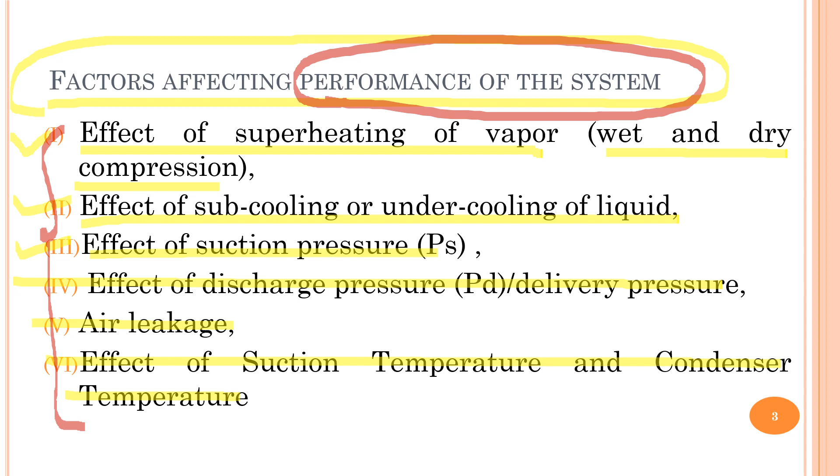So if we find any kind of variation here, what is its effect on the performance of the system, that we have to discuss. And one by one we will start discussion of that part. So first is effect of superheating of vapor.

So you can see the original cycle is 1, 2, 3, 4, 1. Now when we go for superheating, the cycle is 1, 2 dash, 2 double dash, 2, 3, 4, 1. So this is our cycle. So what happens here is the RE value will increase, that is refrigerant effect will increase at the cost of increase in the compression work. So compression work is increased, plus this RE will also increase.

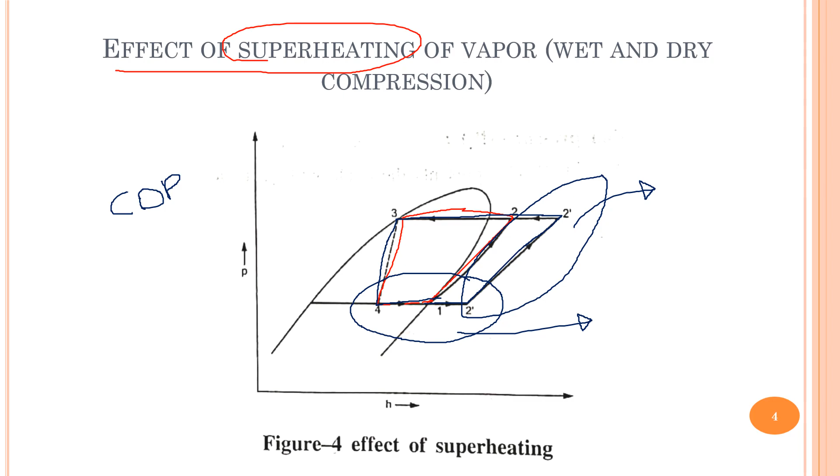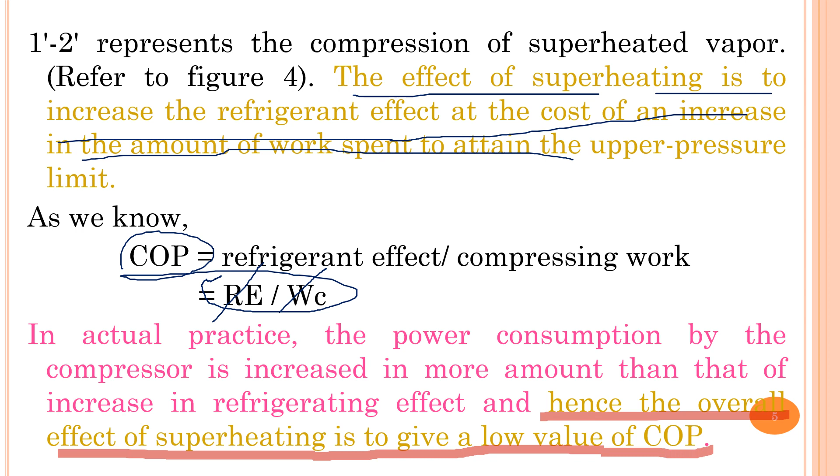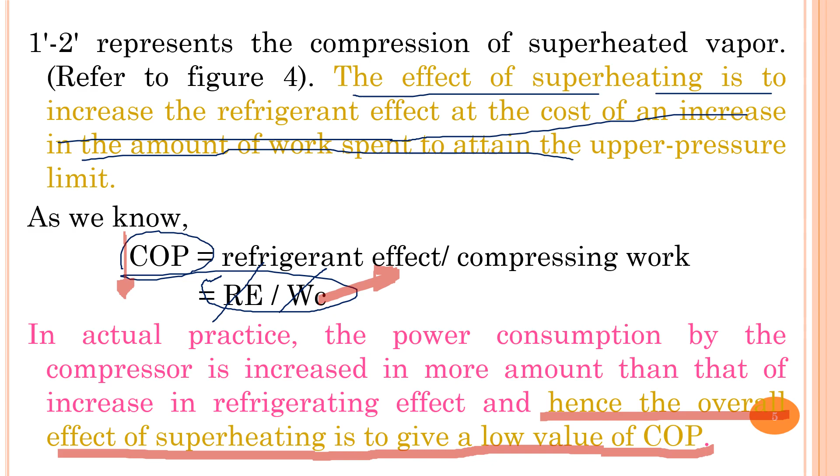So if we talk about coefficient of performance for this VCR cycle, what we can conclude here is, the effect of superheating is to increase the refrigerant effect at the cost of increase in the compression work. So this COP, that is RE divided by WC, RE will increase, WC will also increase. So in actual practice, the power consumption by the compressor is increased by more than the increase in the refrigerant effect, and hence the overall effect of superheating is to give a low value of COP. So when we are going with superheating, WC will increase more, and because of that the COP will drop in the actual case. So friend, I hope this is very clear to you.

Now we'll go with the second part, effect of subcooling or undercooling of the liquid. So friend, you can see our original cycle is 1, 2, 3, 4. But when we go for subcooling or undercooling on the pH diagram, the new cycle is 1, 2, 3, 6 dash, 4, 4 dash, 1. So what you can see here is,

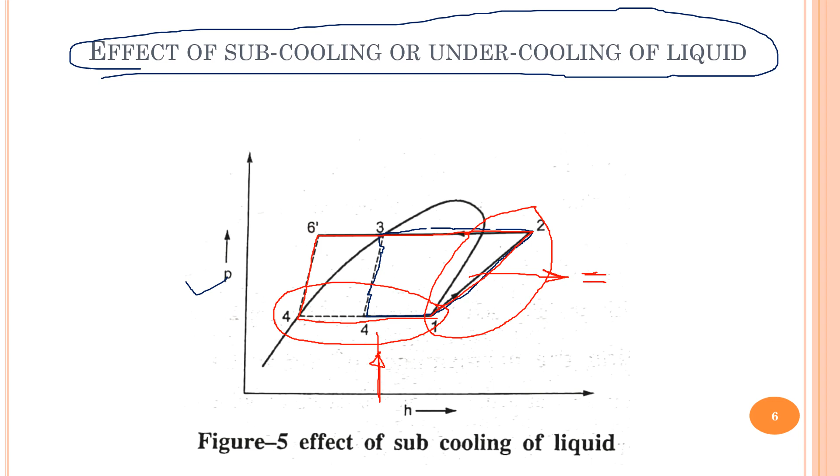by doing this undercooling or subcooling, refrigerant effect will increase with no variation or zero increase in the compression work, or you can say compression work remains the same or constant. So what you can see here is subcooling or undercooling results in an increase in the net refrigerant effect RE with unchanged work input of the compressor, and therefore the effect of undercooling is to increase the refrigerant effect, which in turn increases the COP of the system. Means COP will increase.

So how can we go for subcooling? The subcooling or undercooling may be done either by circulating a large quantity of cooling water through the condenser or by using a water cooler. than the main circulating water, means we have to supply cold water in very large amount, and because of that COP will increase.

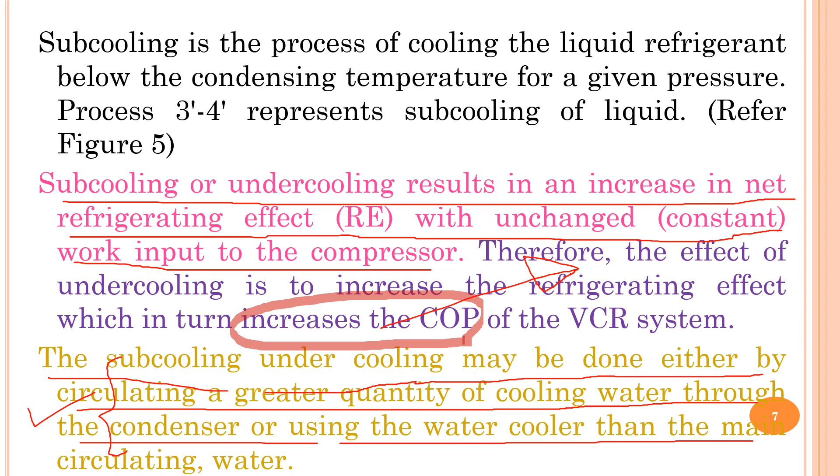Now the third parameter we have to discuss is the effect of suction pressure. Here, we are decreasing the suction pressure. You can see the original cycle is 1, 2, 3, 4, 1. Now if we go for reduction in the suction pressure, the new cycle becomes 1 dash 1, 2 dash 2, 3, 4, 4 dash 1.

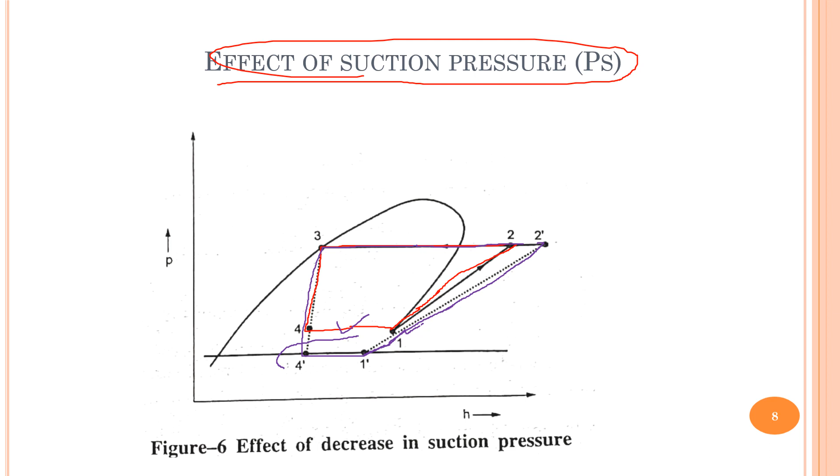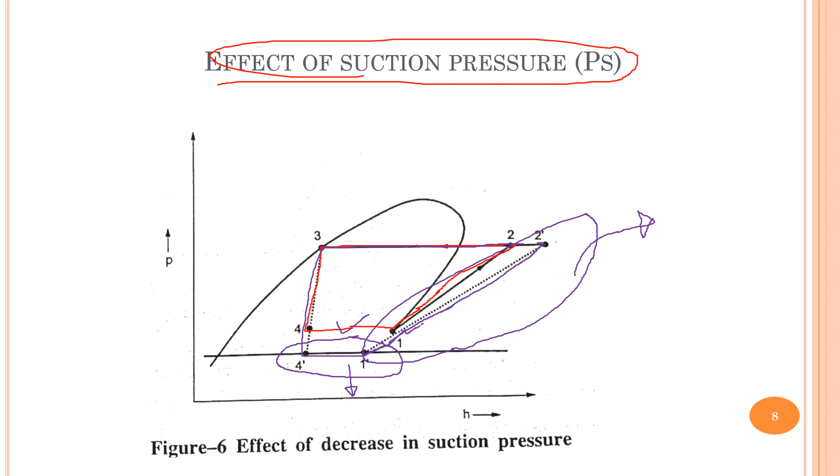Compared to the first one, when we go for reduction in the suction pressure, the refrigerant effect will reduce and the compression work we have to supply will increase. So COP, that is RE divided by WC, will drop. The reduction in suction pressure causes decrease in refrigerant effect at the cost of increase in compression work. The net effect is a drop in COP.

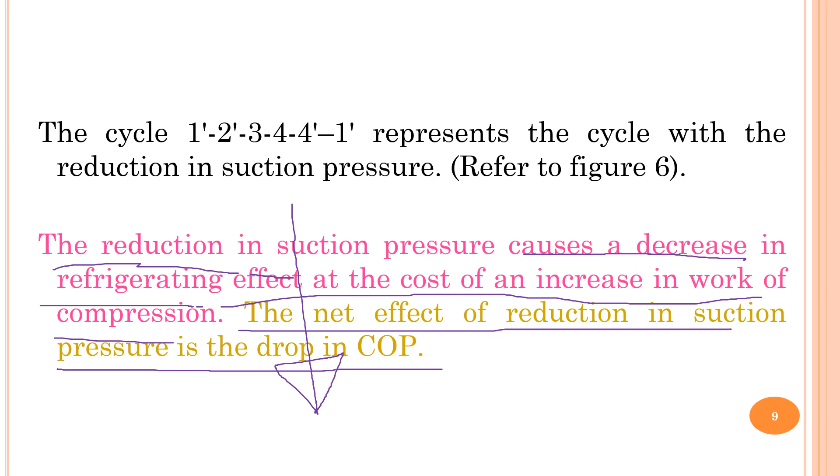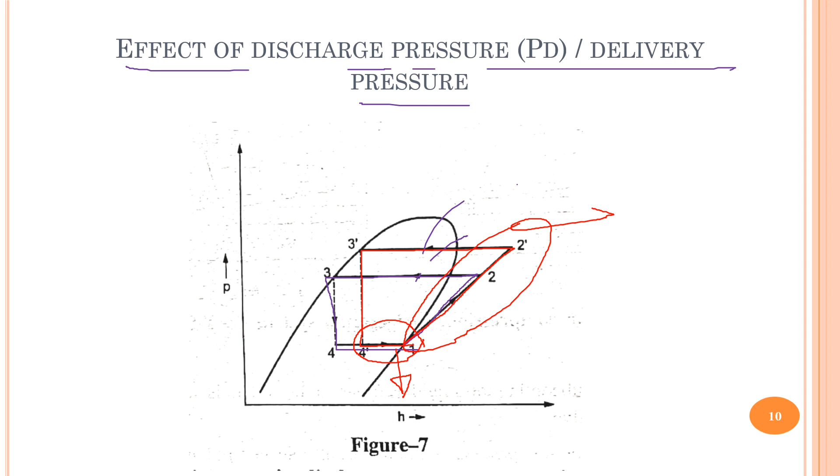Next is the effect of discharge pressure or delivery pressure. The initial cycle is 1, 2, 3, 4, 1. When we go for higher discharge pressure, the cycle becomes 1, 2, 2 dash, 3 dash, 4 dash, 1. So the refrigerant effect will decrease and the compression work will increase. What is the overall effect? The COP will drop.

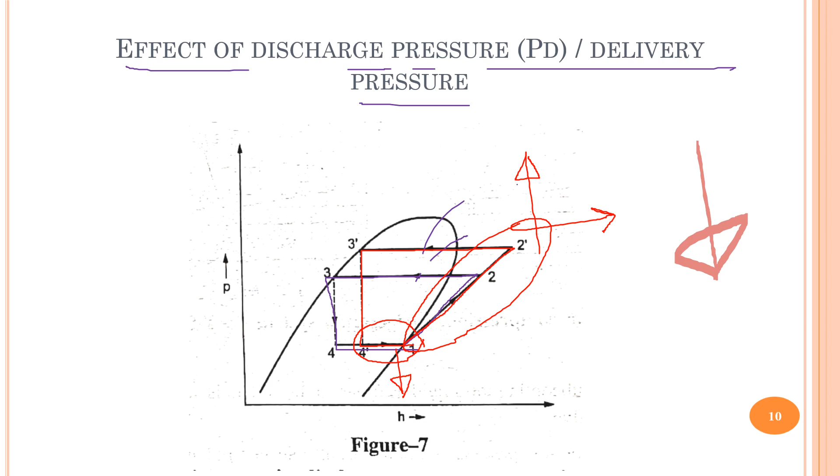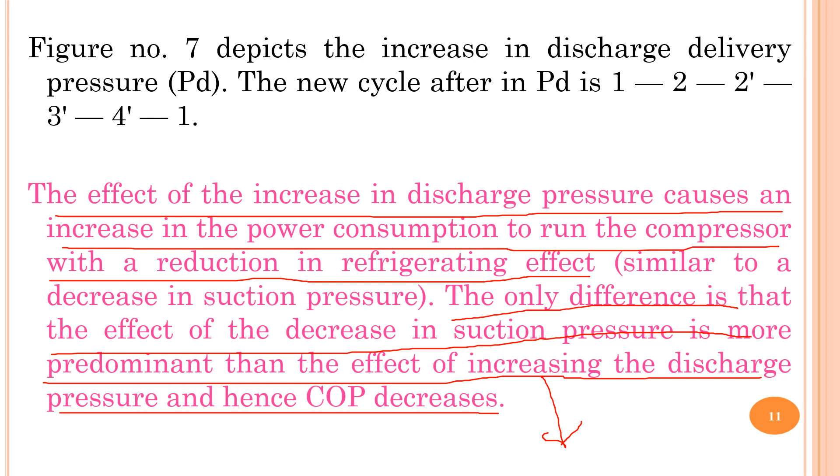The effect of increase in discharge pressure causes increase in power consumption to run the compressor along with a reduction in refrigerant effect. The difference is that the effect of decrease in suction pressure is more predominant than the effect of increase in discharge pressure, but in both cases COP will drop. So when we increase the delivery pressure, COP will drop.

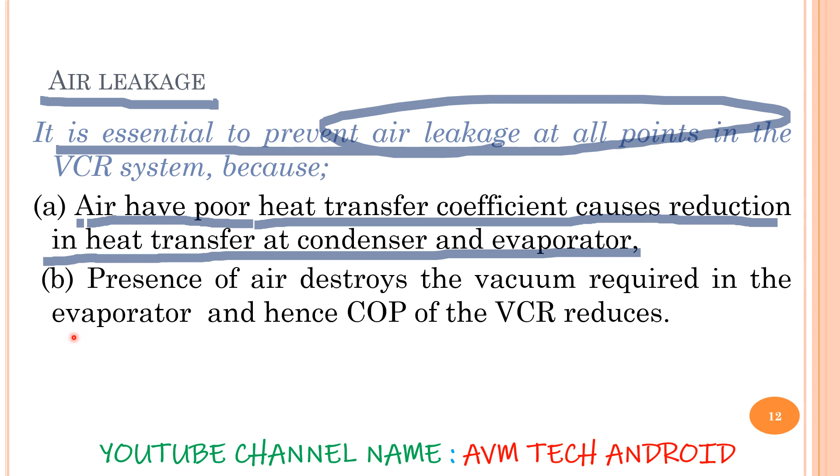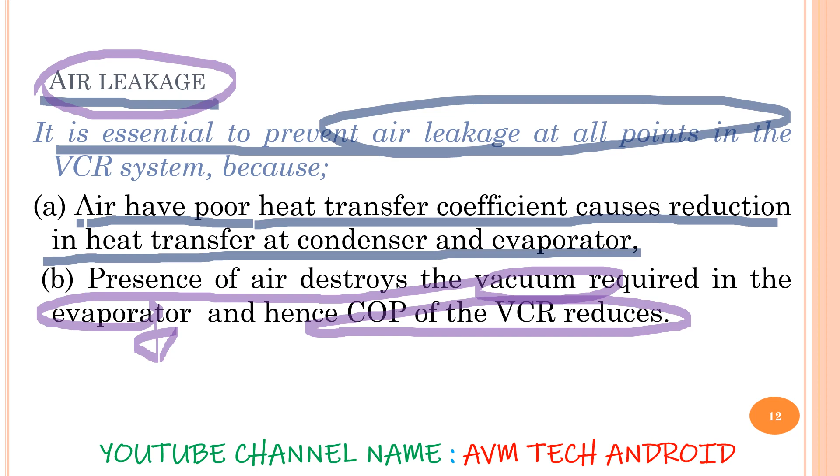Now the next important thing is air leakage. We have to prevent air leakage at all points in the VCR system, because in heat transfer we learned that air is a poor conductor of heat, having a lower heat transfer coefficient, so it reduces the heat transfer. Second, the presence of air destroys the vacuum required in the evaporator, and hence the COP of the VCR system will drop because the required vacuum is lost. So we have to remove air from the VCR system. This is a very important point.

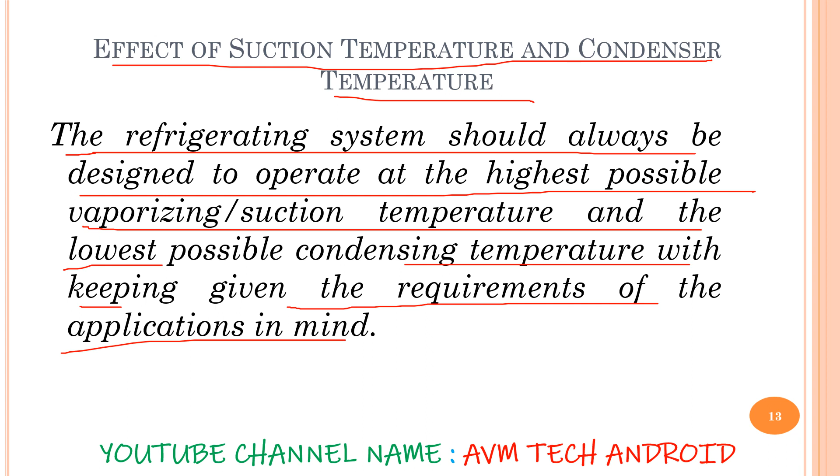The last thing we have to discuss is the effect of suction temperature and condenser temperature. The refrigerant system should always be designed to operate at the highest possible suction temperature and the lowest possible condensation temperature, keeping the given requirements of the application in mind. So we have to keep the highest possible suction temperature and lowest possible condenser temperature, but we have to keep the application part in mind.

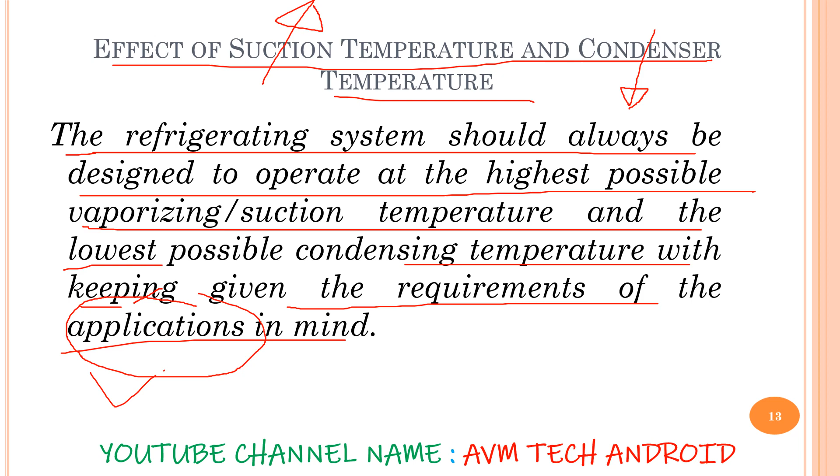So friends, in general we discussed different parameters which affect the performance, that is the COP, of a simple VCR cycle. I hope you get it, and this is a very important video for your internal test, your competitive examination, and your end semester exam also. You have to remember the effect with the help of the p-h diagram, and ultimately you have to write whether COP is decreased or increased, with the reason.